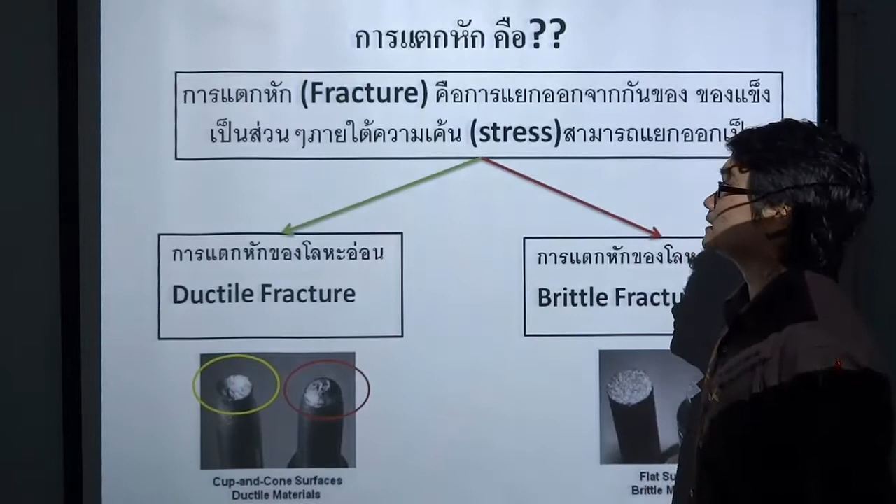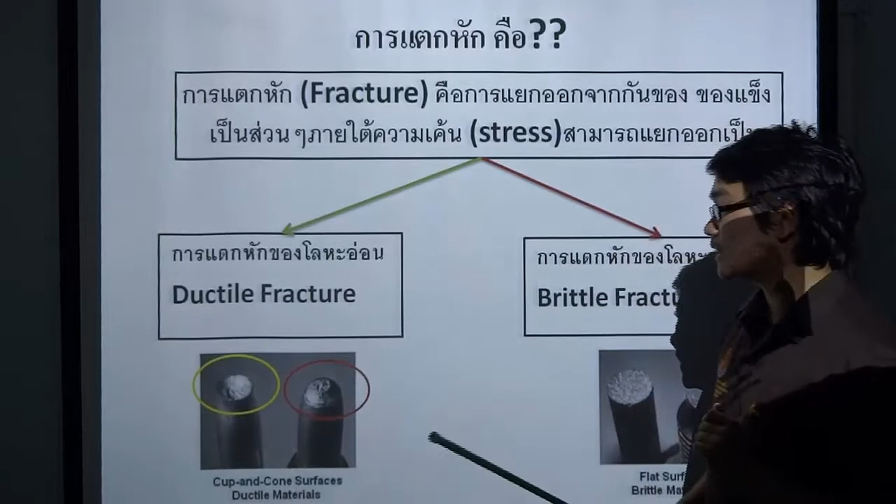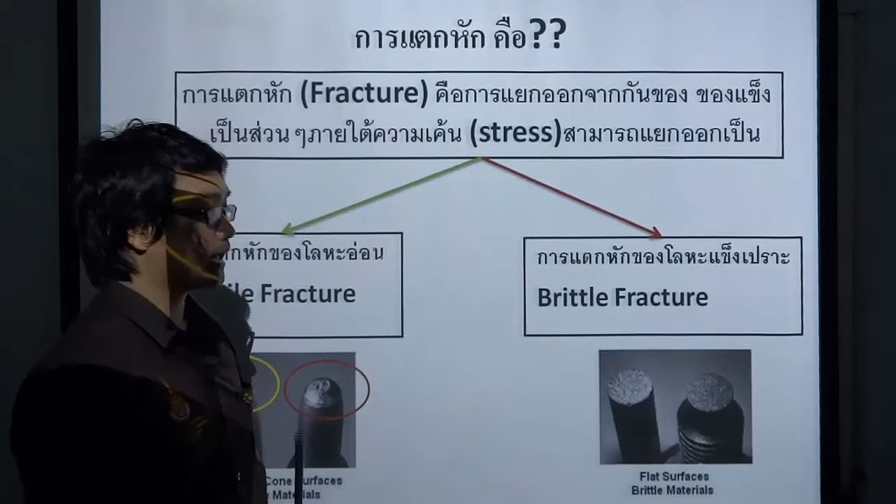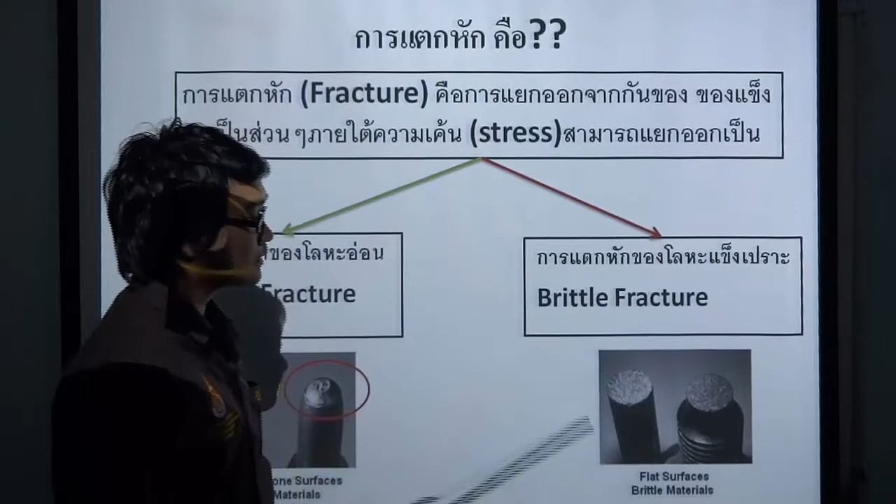fracture ก็คือการแยกออกหรือว่าการแตกออกเป็นส่วนๆภายใต้ความเค้น สามารถแยกออกเป็น2แบบด้วยกันที่เราจะศึกษากัน คือการแตกหักของโลหะอ่อน ductile fracture เมื่อโลหะอ่อนเกิดการแตกหัก มันจะออกมาในรูปแบบ cup and cone surface ดักไทล์ material คัพก็คือเหมือนถ้วยกาแฟ ฝั่งนี้จะเหมือนถ้วยกาแฟ โคนก็คือเป็นโคน ถ้ามีการแตกหักของโลหะอ่อนเกิดขึ้นก็จะสังเกตง่ายๆว่ามันจะเป็นรูปถ้วยกาแฟแล้วก็เป็นรูปโคน ต่อไปดูการแตกหักของโลหะแข็งกรอบ brittle fracture ลักษณะของมันก็จะสังเกตง่ายๆคือผิวหน้าที่แตกหักจะเป็นแฟลต surface เรียบ ต่อไปไปดูหัวข้อการเกิดรอยแตกของโลหะอ่อน

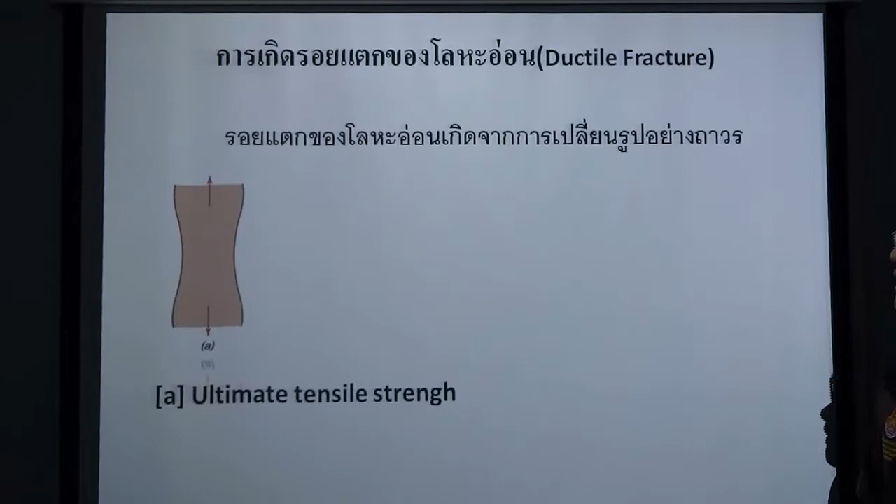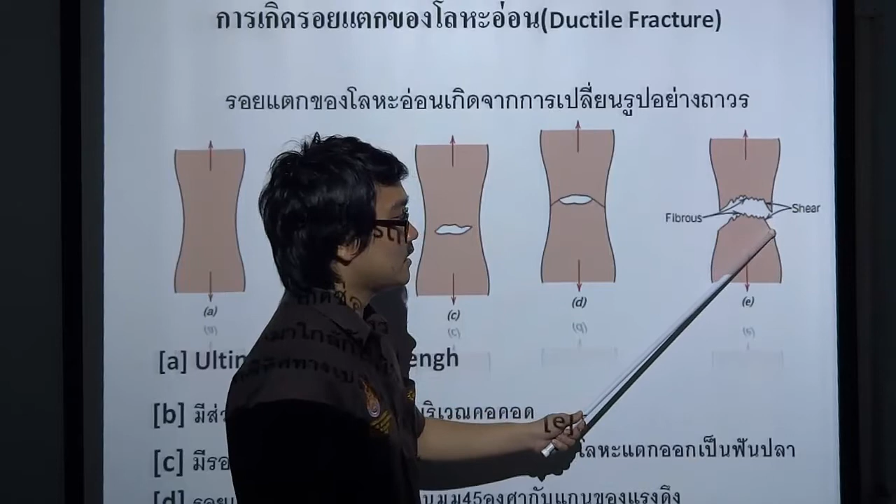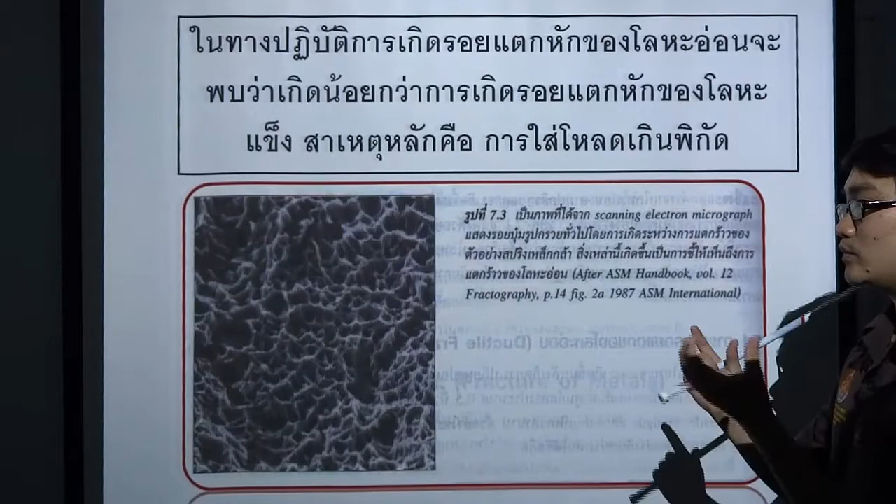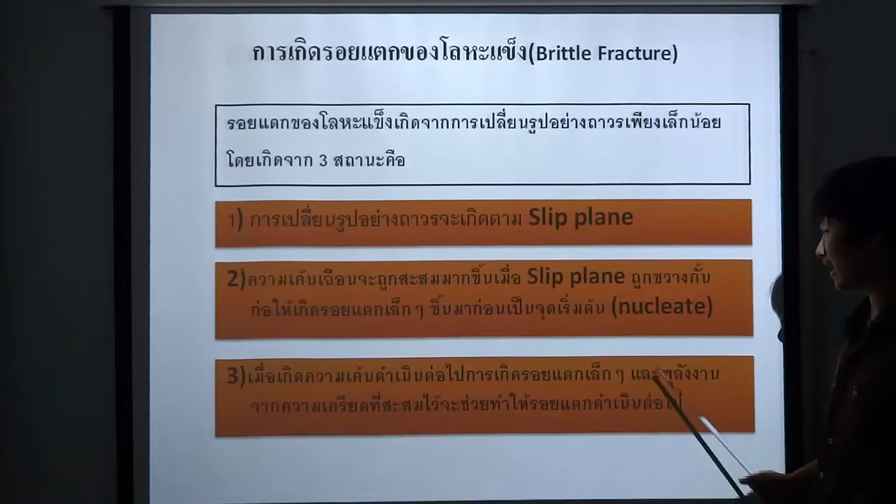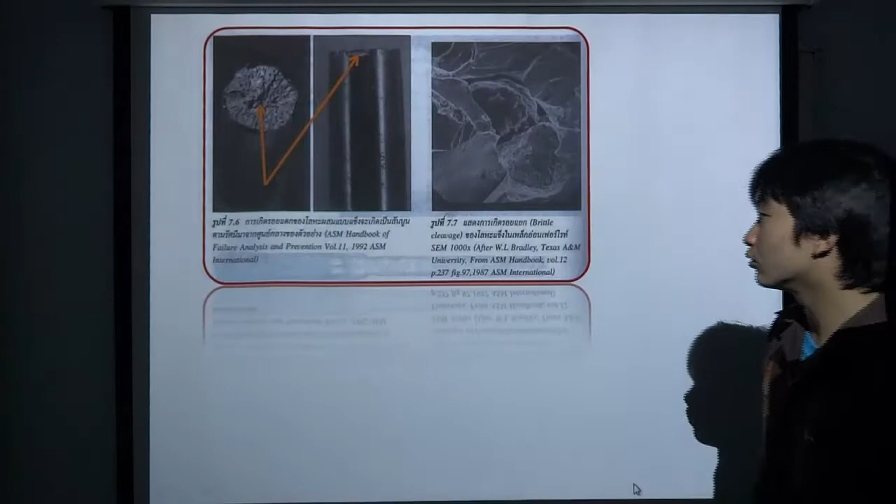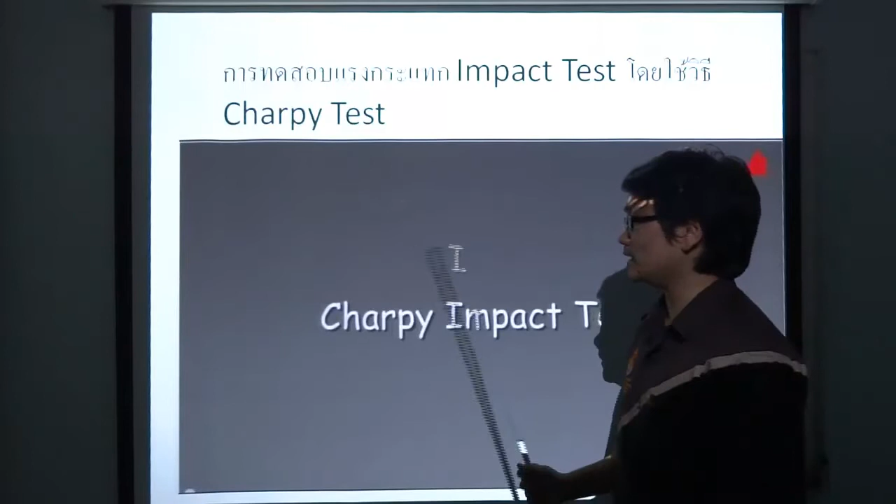ต่อไปเป็นการทดสอบแรงกระแทก หรือว่า impact test ผมเอาคลิปวิดีโอมาให้ดู เป็นวิธีการทดสอบแบบชาร์ปีเทสต์ โดยใช้เครื่องมือเพนดูลัม เดี๋ยวเรามาดูคลิปวิดีโอกันเลยครับ

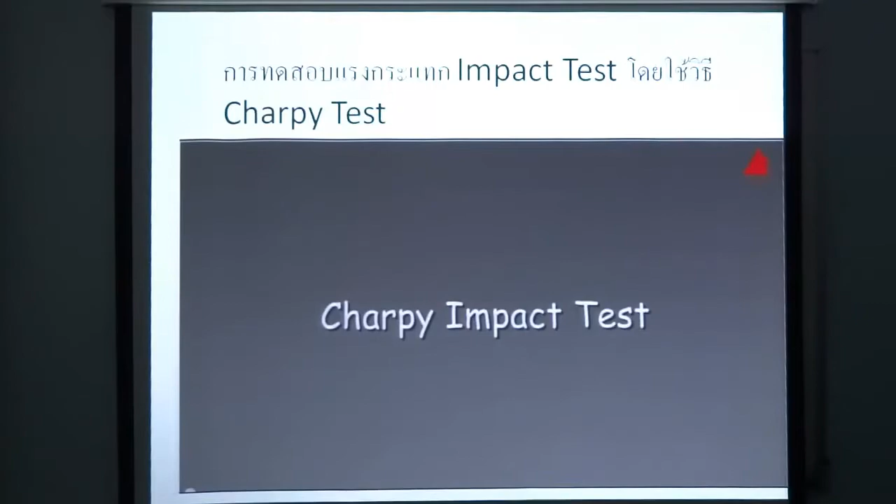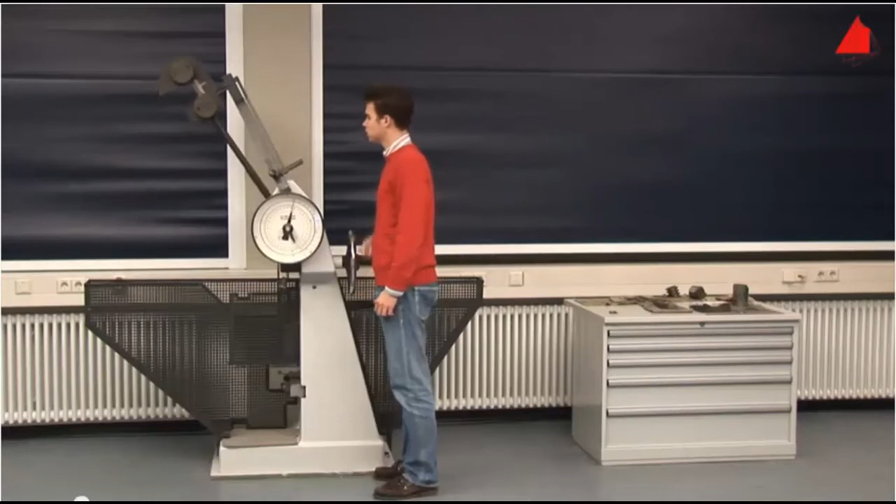The Charpy Impact Test. The standardized Charpy Impact Test has been designed to measure the toughness of materials under impact loading and multi-axial stress state. A pendulum impact testing machine is used to do so. The pendulum on the machine has a heavy weight at the end. This is lifted into the starting position in step 1. Then the tester checks whether the testing machine has been adjusted accurately. In order to do this, he turns the drag indicator downwards and releases the pendulum without a test specimen. The drag indicator stops at position 0. This proves that the pendulum has the correct starting position and that the friction is correctly compensated. The machine is ready for the tests.

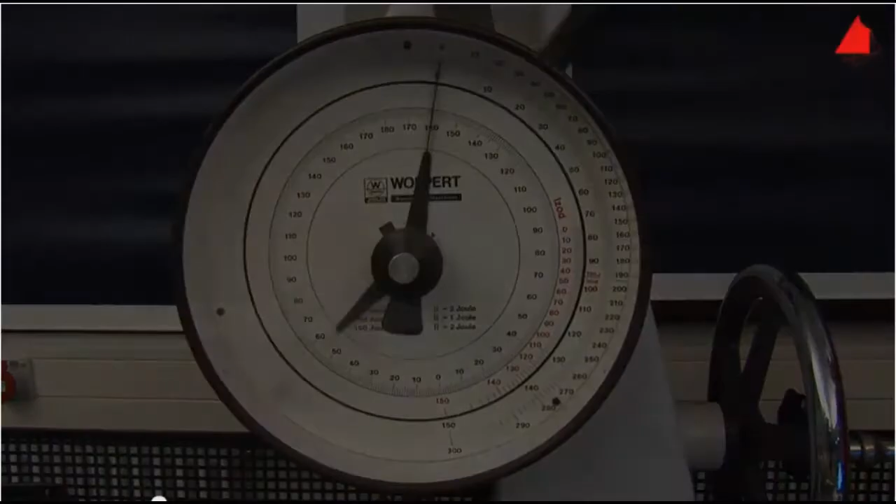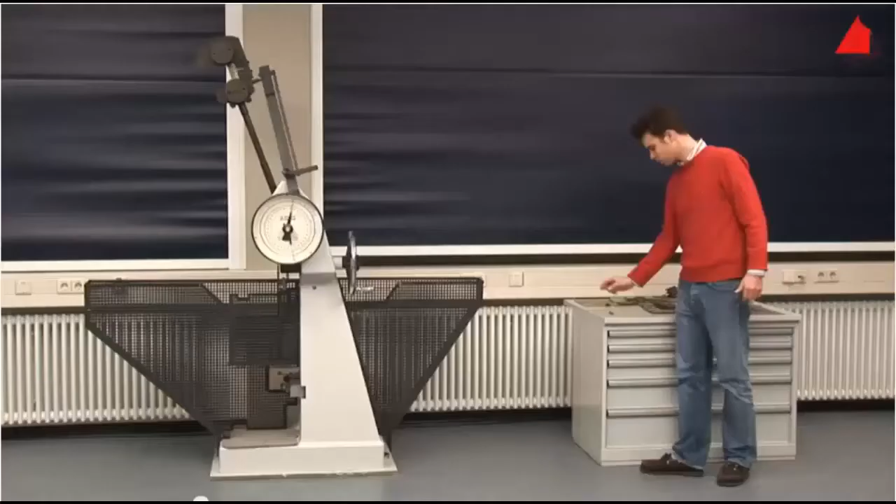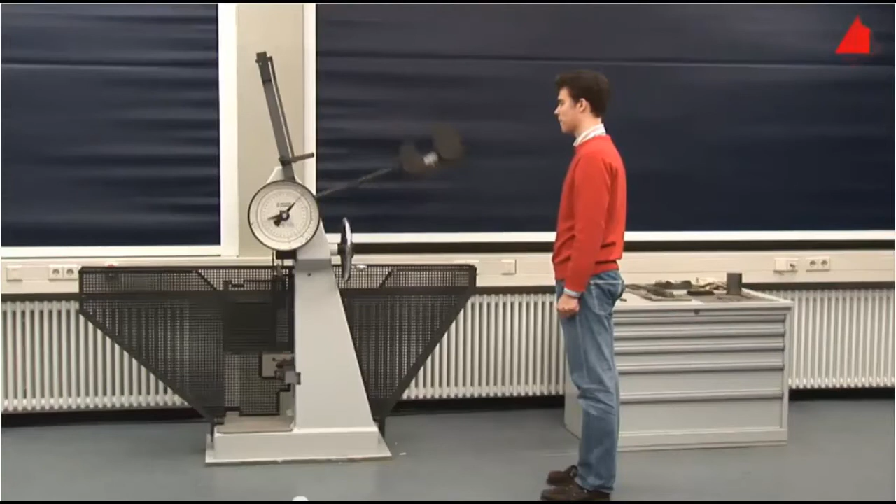First test, strain-aged plain carbon steel S235. This is our test specimen. It has been machined to standardized size and shape with the characteristic V-shaped notch. The tester places the specimen on a support in the lower part of the machine and adjusts its position with a centering device. Next, he turns the drag indicator downwards again and checks that everything is prepared correctly. Perfect. The test can begin. The pendulum is released, it swings downwards and hits the specimen with its rounded hammer peen. The specimen absorbs part of the pendulum's energy, so the pendulum doesn't reach the full height on the other side. The amount of energy that has been absorbed by the specimen can now be read off at the position of the drag indicator. It only amounts to 13 joules in this test.

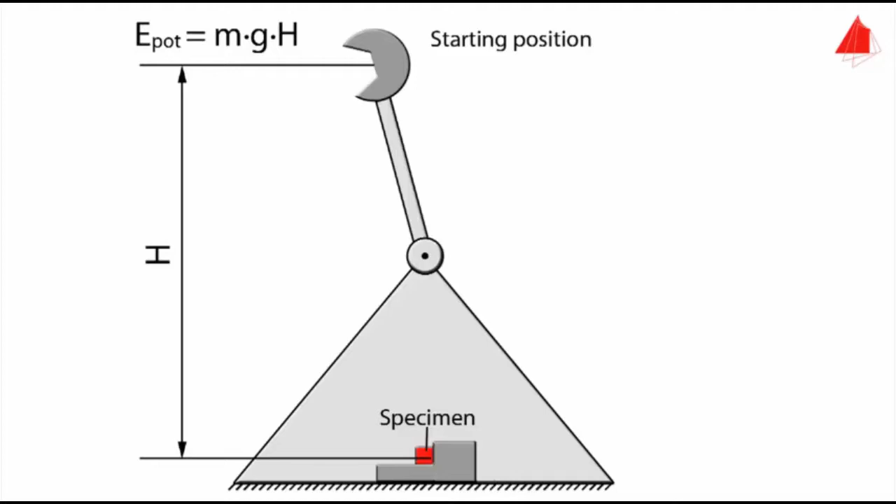Here is the main principle of the measurement. In its starting position, the pendulum only has potential energy. It is given by mass of the hammer m times gravitational acceleration g times starting height capital H. After the pendulum has been released, the hammer moves downwards, hits the specimen, and then only swings to height small h. Exactly at the first reversal point, the pendulum again only has potential energy, which is m times g times small h. The energy that has been absorbed by the specimen is called notch impact energy, KV. It corresponds to the difference between the two potential energies.

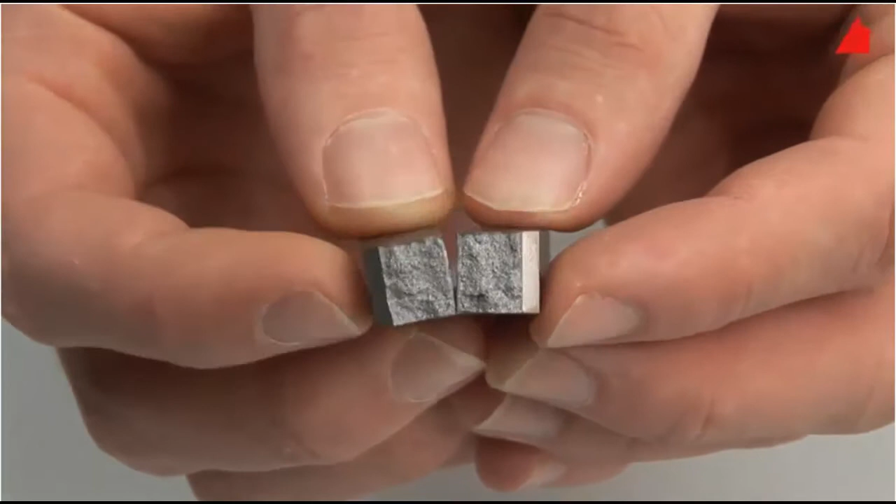The first specimen only shows very little plastic deformation. A mostly flat, slightly glittering fracture surface has been formed. This is another important indication that this kind of steel is only able to absorb small amounts of notch impact energy. It shows mainly brittle behavior due to the strain aging effect.

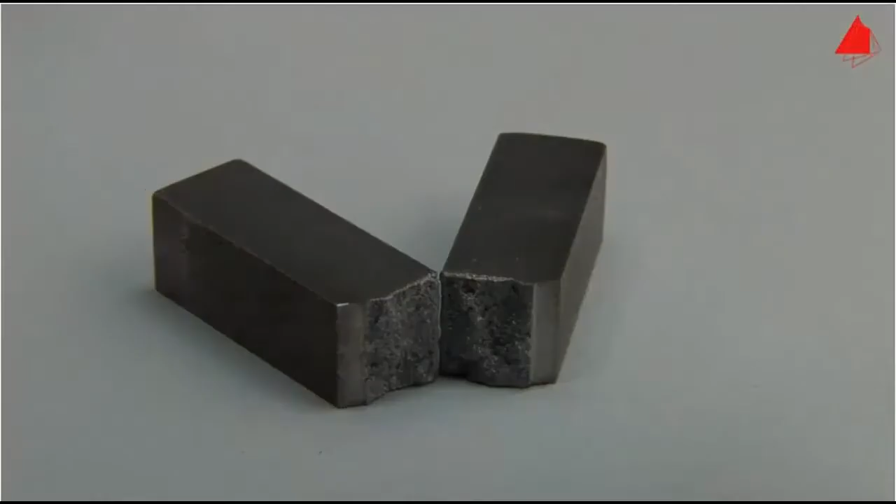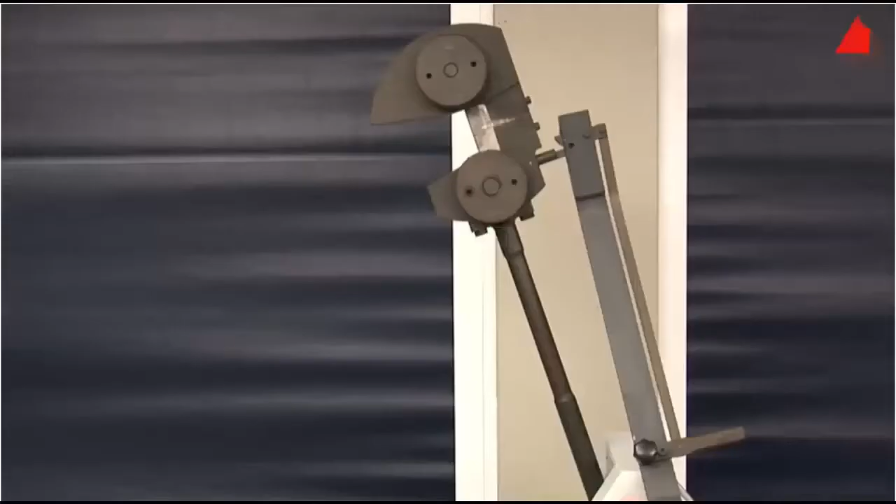Second test. The second specimen has been made from normalized steel S235. It is also placed on the support and centered. The tester turns the drag indicator to its starting position, rechecks all safety measures, and releases the pendulum. This time the impact sounds much deeper and richer. An impressive energy of 182 joules has been absorbed by the specimen. Here the specimen did not break into two pieces. Instead it was pushed through the counter bearings under heavy plastic deformation. In comparison with the strain-aged steel, the normalized steel absorbs much more notch impact energy and behaves in a very tough manner.

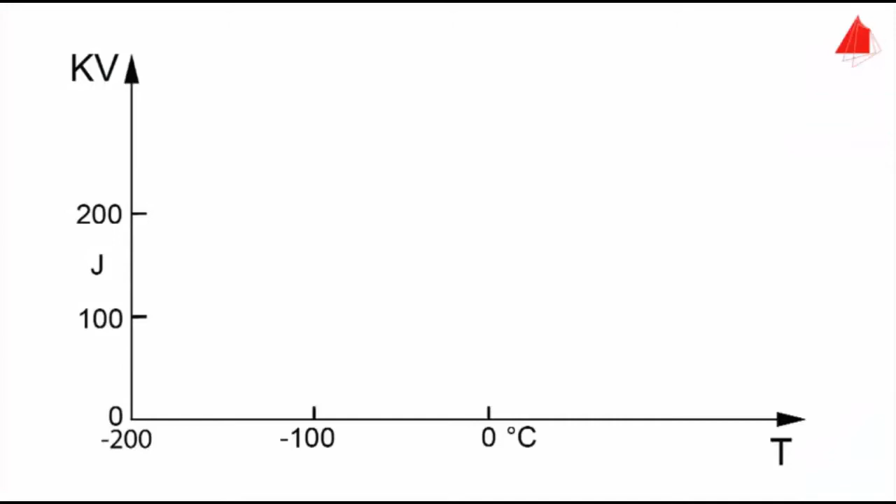The Charpy impact test is not only carried out at room temperature. Materials with body-centered cubic crystal structure, such as plain carbon steels, show a characteristic S-shaped curve of the impact energy versus temperature. In the so-called upper shelf region, the material absorbs a lot of energy and behaves in a tough manner. At low temperatures, in the lower shelf region, only a small amount of impact energy is absorbed and brittle fractures occur. Metallic materials with a face-centered cubic crystal structure, on the other hand, do not experience a ductile to brittle transition. These materials retain their ductile behavior towards low temperatures and are therefore well suited for low temperature applications.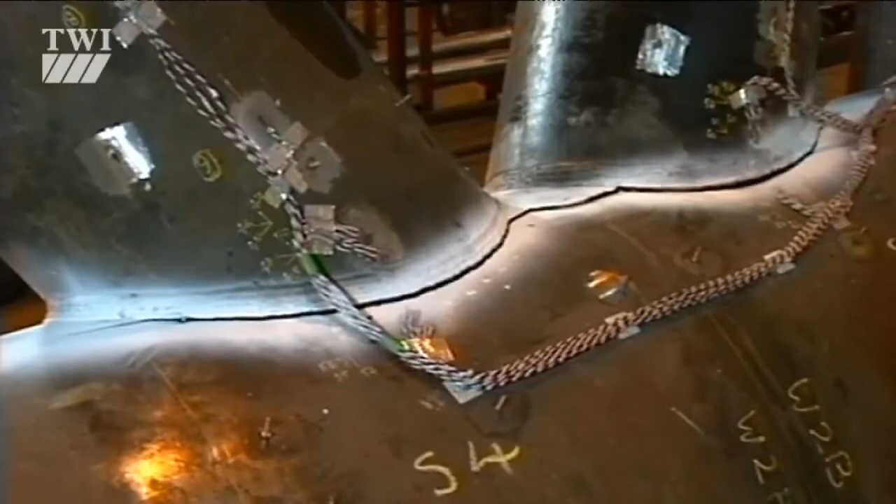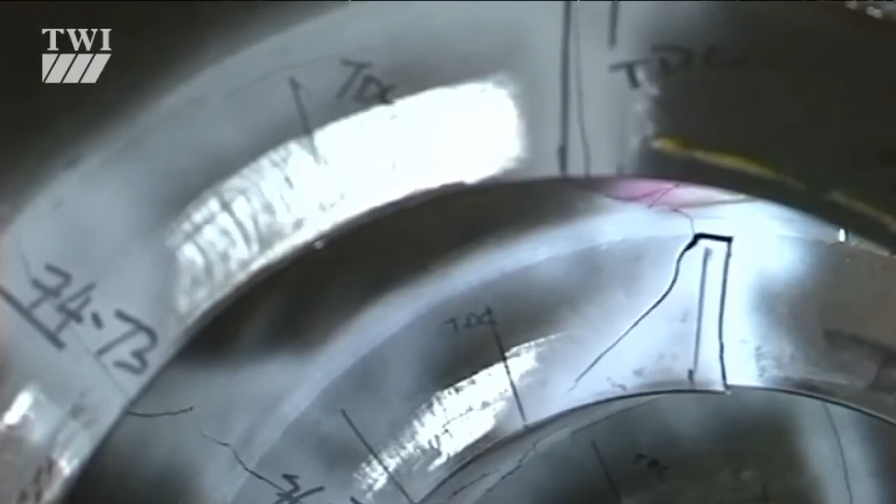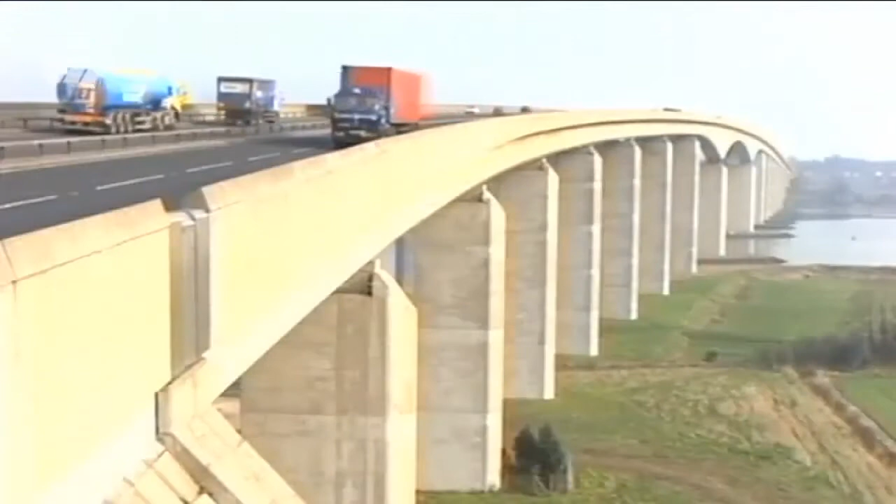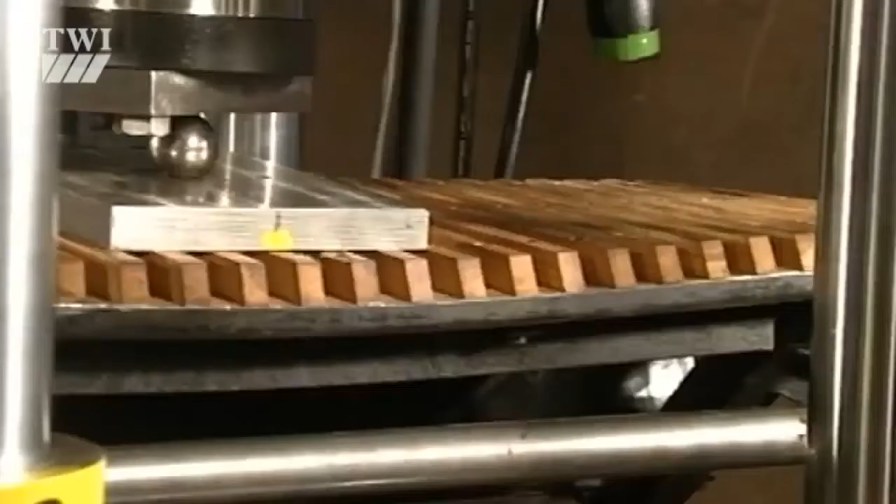Fatigue, variously defined as exhausting the strength or power of recovery, the deterioration of a material under repeated loading, and in the structural sense, the formation of a crack or cracks as a result of the repeated application of loads, each of which is insufficient by itself to cause normal static failure. Not one loading cycle, not 100 or a few thousand, but possibly millions and millions during the life of the structure. Examples exist throughout engineering. Structures large and small, dynamic and static, they all endure fatigue loading, and as such, have a fatigue life.

We can examine fatigue cracking safely in controlled laboratory conditions. Take this beam, for instance, a model box girder in a 4-point bending test. The test machine applies a preset load once every 5 seconds.

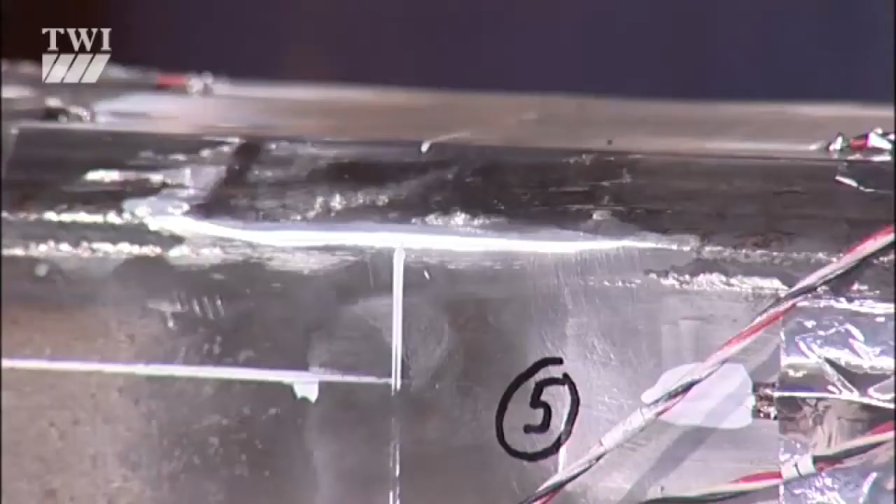Although the stress developed is easily within the elastic range of the material, and the load sustained safely, repetition of the stress ultimately leads to cracking, often at welded joints. Because they appear after repeated loading, they're known as fatigue cracks.

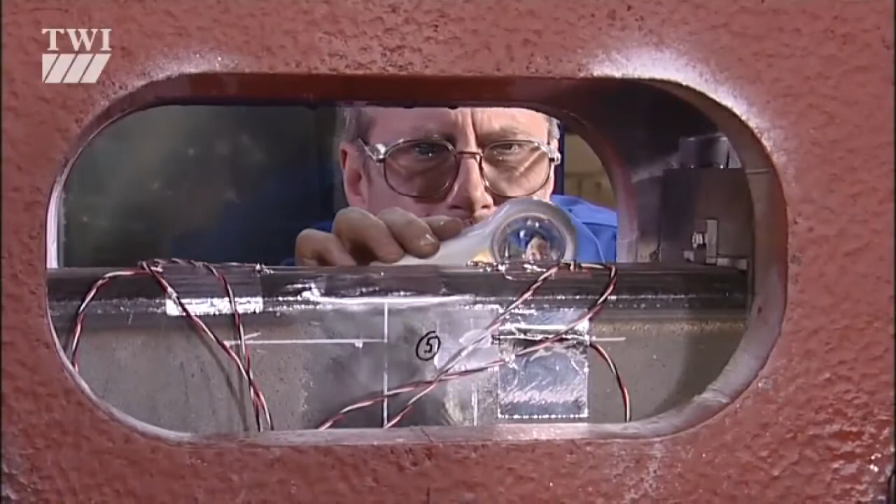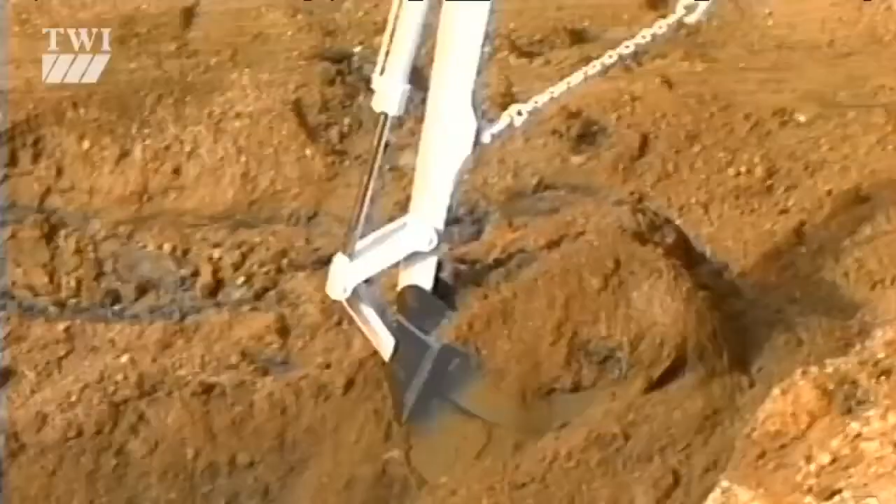Excavator components are largely welded fabrications. Parts are tacked together, then fully welded using MIG or submerged arc welding. In service, they're subjected to a heavy load every time the bucket digs into the ground, which is pretty frequent. So the component's design, welding and inspection must reflect this fatigue loading.

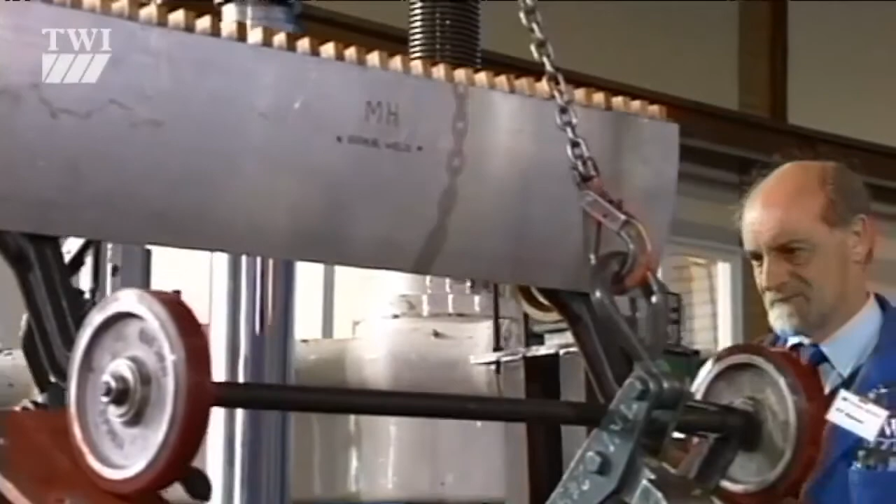Small portable parts can be tested in the severest conditions in the lab. But if the job is large and in full-time service, like a bridge support, a pipeline or an aircraft wing, then that's impossible. We need information at the design stage to predict the likely fatigue, wear and corrosion behavior of the structure. We can gather this by laboratory tests of individual welded joints.

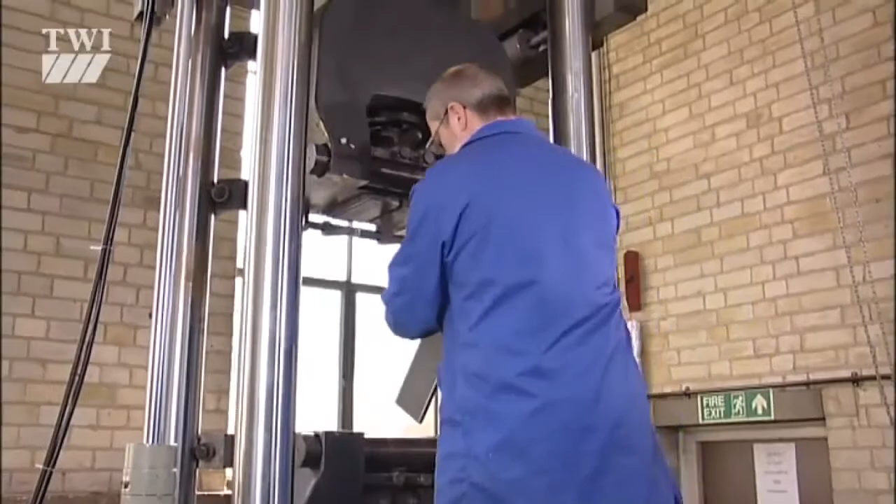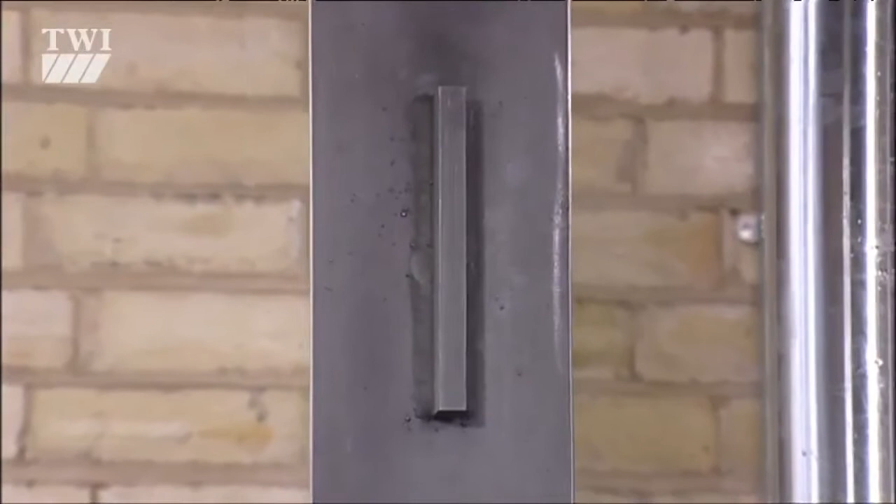Here we use a flat plate in simple tension with attachments on either side. The longitudinal fillet welds contribute little, but we'll see they pose a significant threat to the fatigue life of the specimen. But first, a simple tensile test.

Elastic deformation is followed by plastic deformation. Necking becomes evident and ductile rupture occurs at a load corresponding to the material's tensile strength. It leaves a characteristically irregular fracture surface.

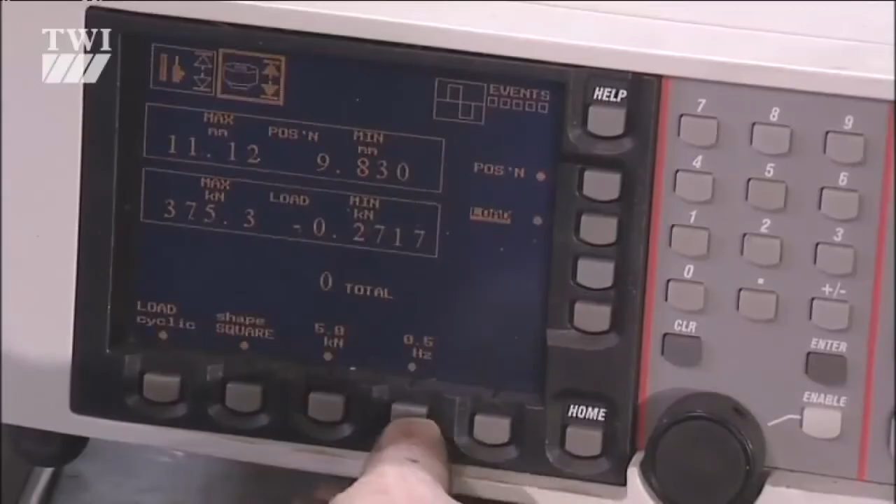Now, contrast this with a similar specimen in a fatigue test. A cyclic tensile stress is applied hydraulically. Eventually, it causes fatigue cracking, just here at the end of the weld.

The crucial thing is that this has happened at a stress well below the elastic limit. Fatigue cracking appears at the weld toe because of the local stress concentrations and also small weld imperfections.

We can clearly watch a fatigue crack growing by testing this aluminium plate specimen in a fatigue test machine. By compressing time, we can speed up the view of crack growth. The test piece has an artificial stress concentration so that the crack is located accurately.

By polishing the surface, we can see the crack propagate: first 10 millimeters, then 30 millimeters, to final failure.

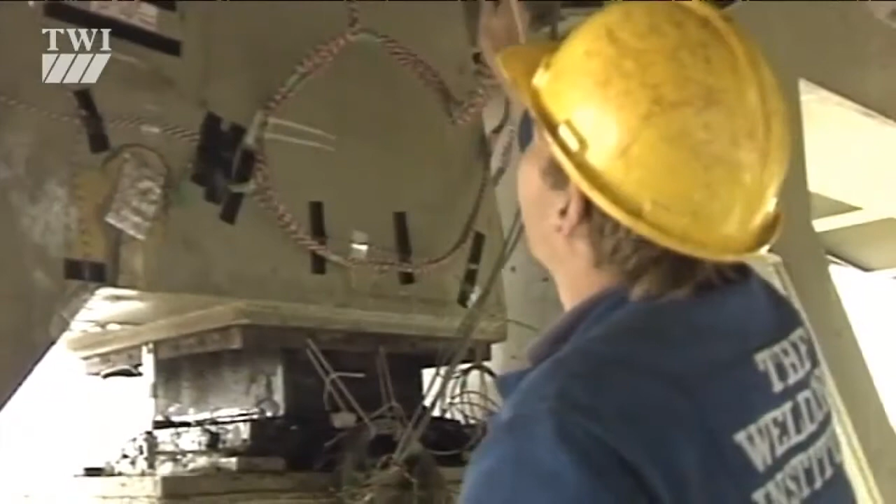In service, it's important to inspect for evidence of fatigue early in a structure's life, close to load-carrying members where the cross-section changes abruptly. Of course, rust, dirt or paint can make this site job a tough and onerous one.

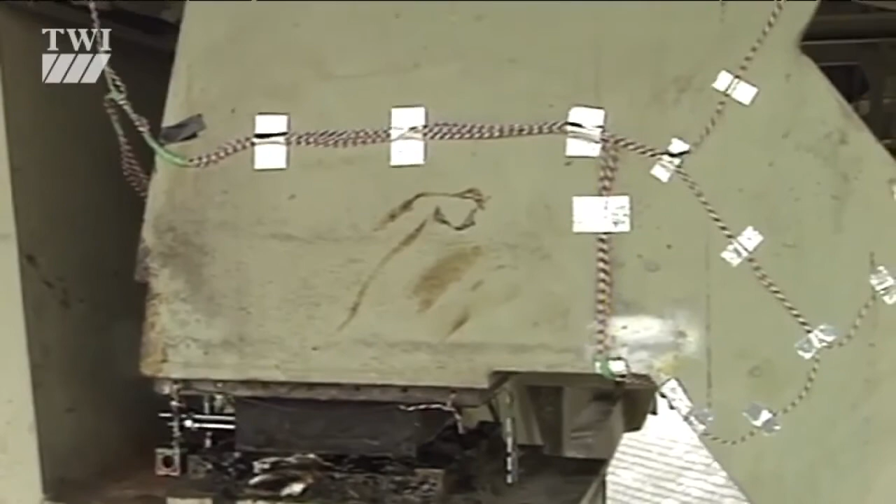If it's not spotted, a crack will grow progressively until the remaining cross-section can no longer support the force applied, and rapid ductile or brittle fracture occurs.

Fatigue crack surfaces have a distinct look about them: a smooth appearance around the point of initiation and well-defined steps corresponding to the last few cycles just before fracture.

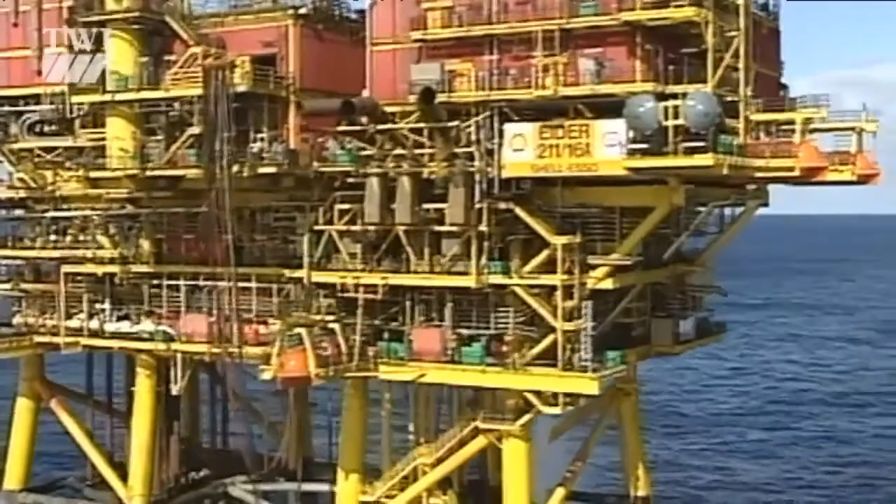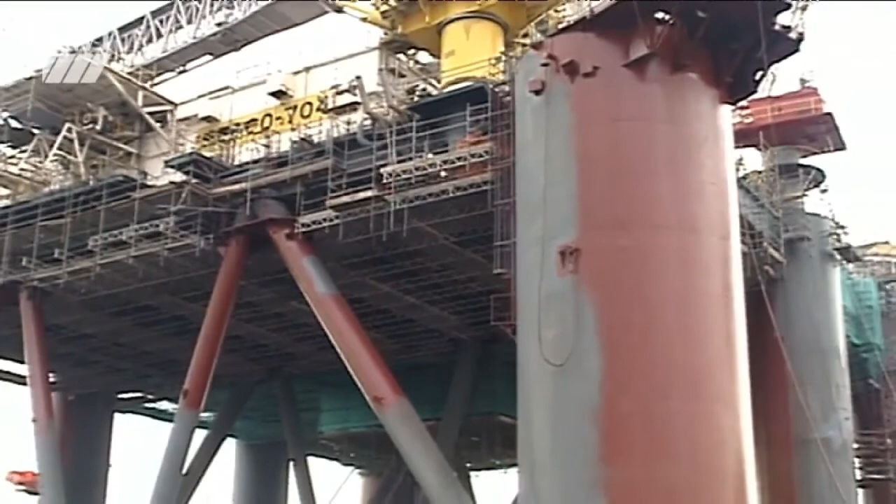In practice, a degree of redundancy is often present in engineered structures. So, a redistribution of stress takes place, and the propagation of a crack may be slowed down or even halted. There's no danger of collapse, but the structure's stiffness may have deteriorated to an unacceptable level.

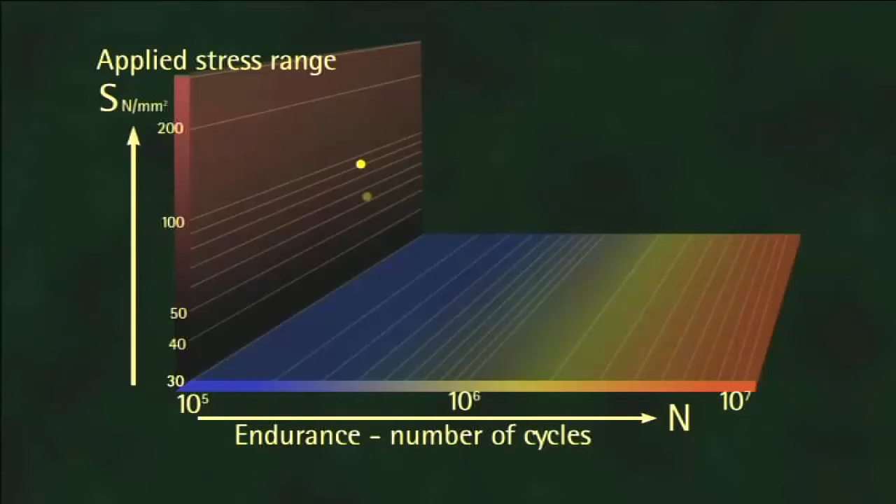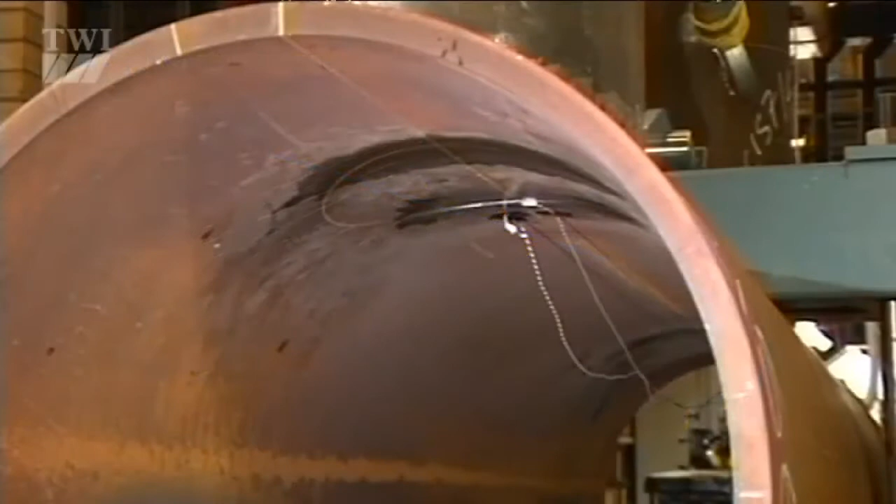By testing several specimens at different stress levels, we can create a mean line for fatigue performance. The required life of the joint, expressed as a number of stress cycles, can be related to the allowable stress range for the particular joint. If the stress level is raised, a shorter life must be accepted, or, of course, the joint design changed.

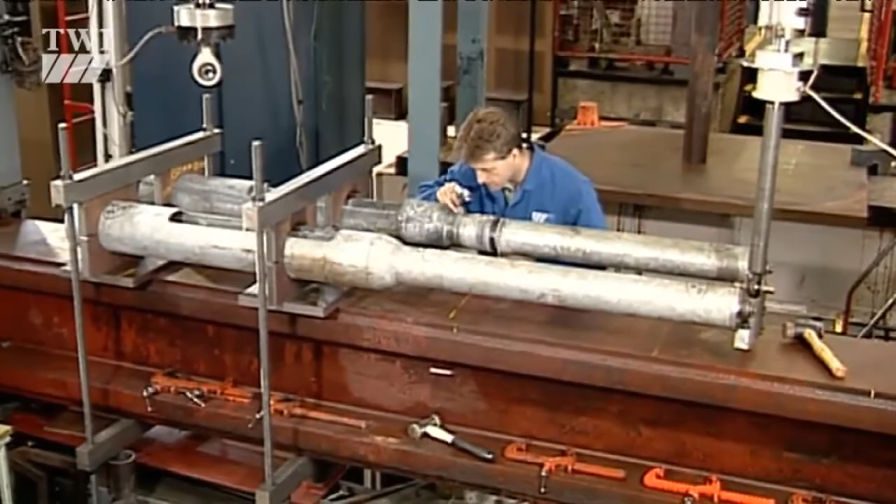Different welded joint designs give different fatigue performances. The design of this lamppost, for instance, includes a stress concentrator, which has created an unpredictable fatigue behavior.

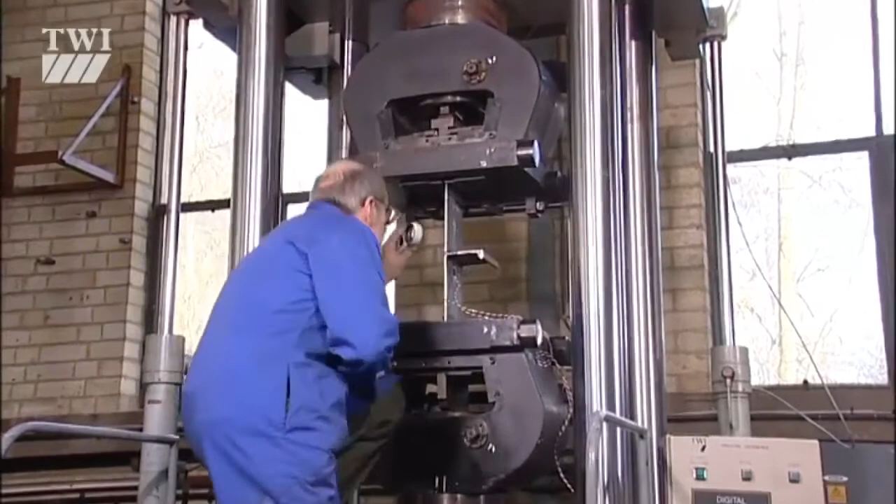So far, we've only looked at tests where the stress cycles are of equal magnitude, what's called constant amplitude loading. Of course, in practice, they're often very different. This bridge carries both heavy trucks and small cars.

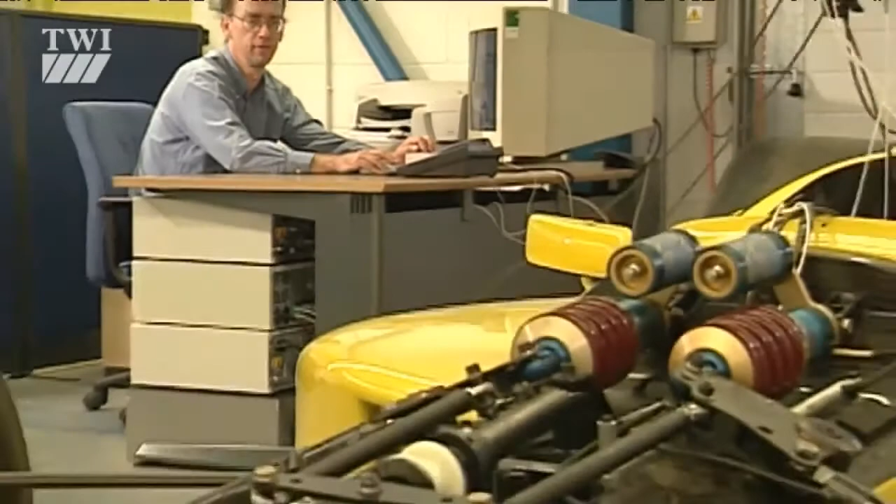So it's only by testing welded joints under variable amplitude loading, typically using a computer-controlled machine, that we can simulate actual service behavior. Fatigue cracks produced under variable load are usually characterized by beach marks, centered around the point of initiation.